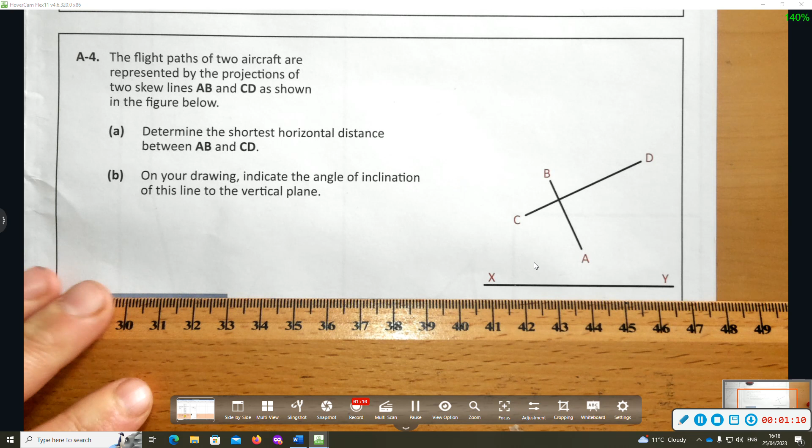Okay, right. Anyways, we'll get started. So we've got to determine the shortest horizontal distance. So to do this, I want to draw a horizontal line from C. Now this is going to be a strike line in plan. Okay, now I want to create a plane that's parallel to line AB and contains the skew line CD.

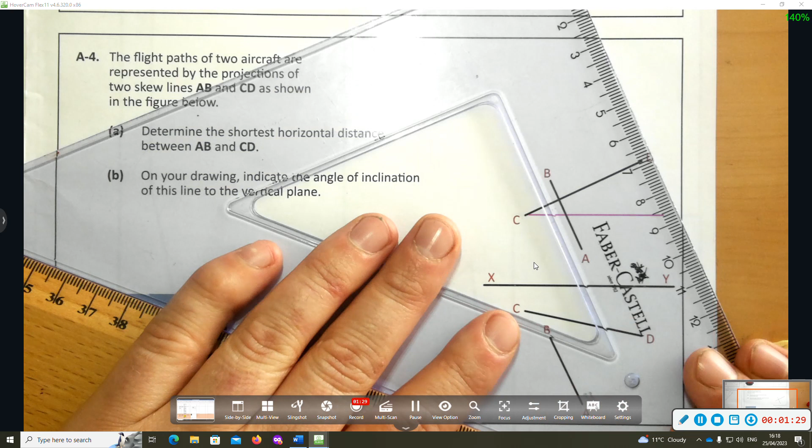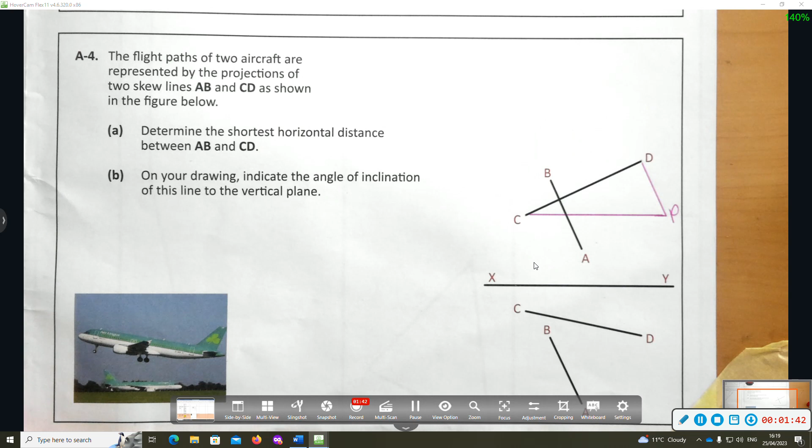So I'm going to go parallel to line AB from point D. Okay, now this is going to intersect at point P. Alright, now I need to get the plan view of point P. And parallel lines are parallel in every orthographic view. So I'm going to drop point P down to plan view.

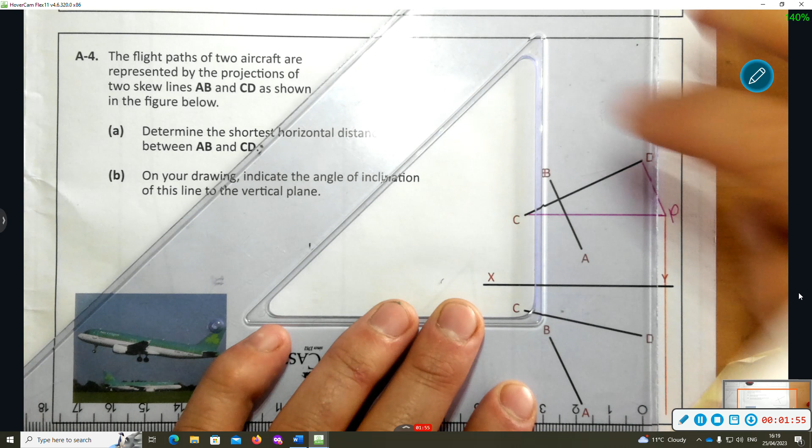Okay, and if I went parallel to line AB from point D in elevation, I must do the same thing in plan. So I'm going to go parallel to line AB, okay, from point D in plan.

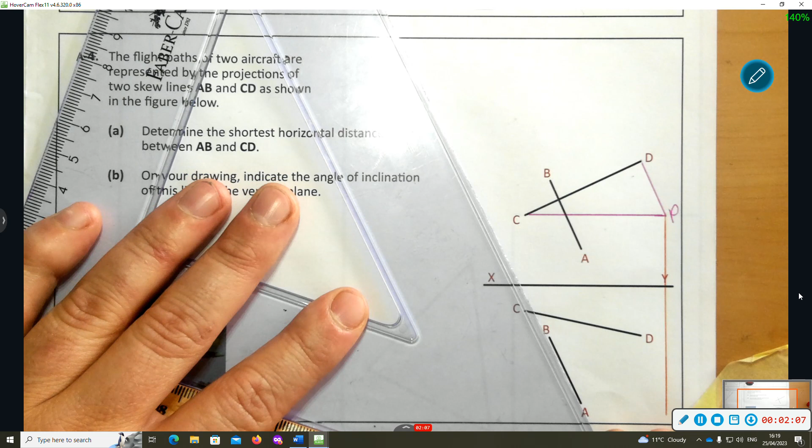Just turn off the light there on my camera, make it easier for me to see.

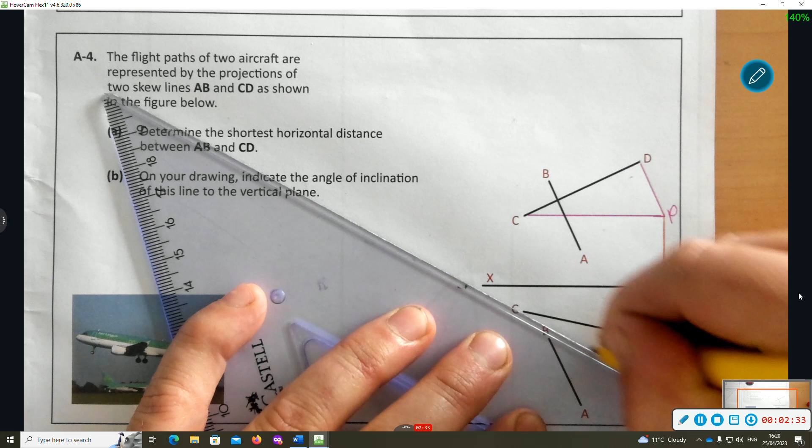So I'm going parallel to line AB from point D. Now, this is point P in plan, and it joins back to C. Now, this is a strike line, okay? And a strike is a true length in plan. So it's the true length.

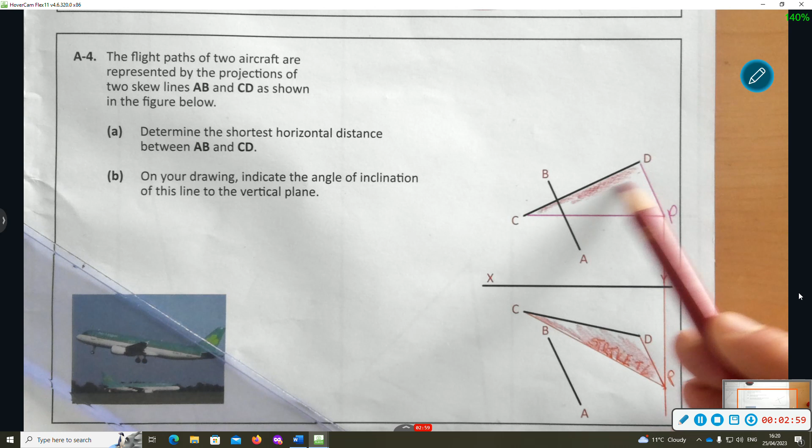The next thing we're going to do now is look along the true length of this strike line, C to P. And when we do that, surface CDP, the lamina, is going to project as an edge view because a line on that surface is going to project as a point.

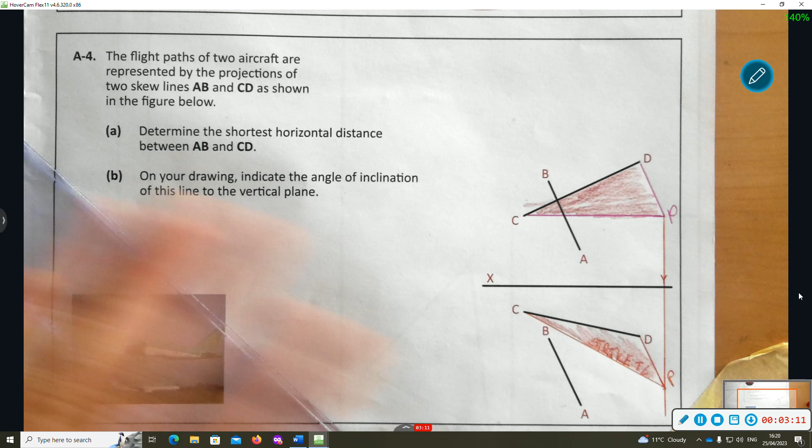So I'm going to project an auxiliary, okay, along line CP, and it has to be an auxiliary elevation, right? It can't be an auxiliary projected from elevation. And the reason for that is because then we wouldn't get the shortest horizontal distance, because the X1, Y1 line would represent a completely different plane.

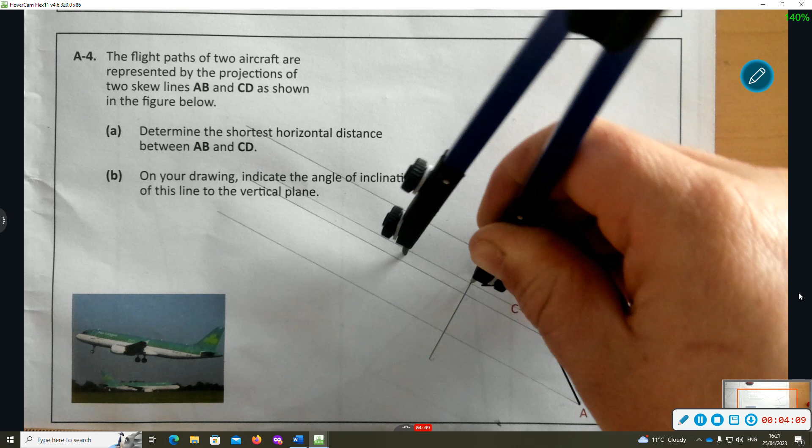So I'm looking parallel to line CP. I'm going to draw in my X1, Y1 line. I'm going to get my heights from elevation now. So I'm going to use my compass to get my heights from elevation. So C to P, going to mark that there. Or sorry, I meant XY line to C rather, and XY line to B, XY line to D, and I have to do point A.

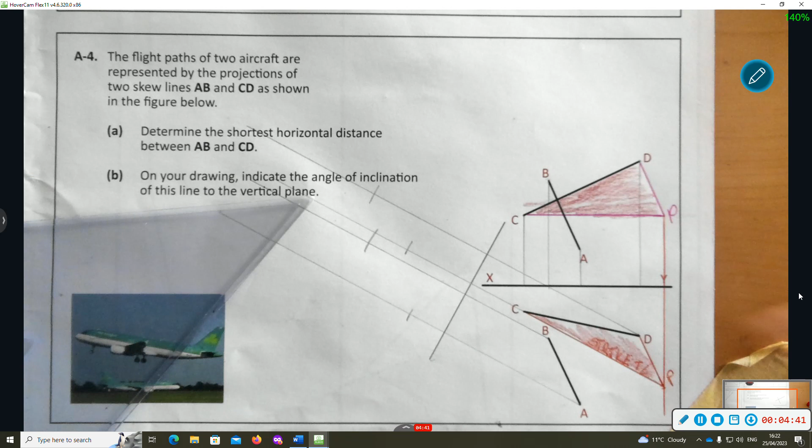So here is point B1, A1, okay, D1, and this is P1/C1. Now I'm going to join A to B. I'm going to join D to C.

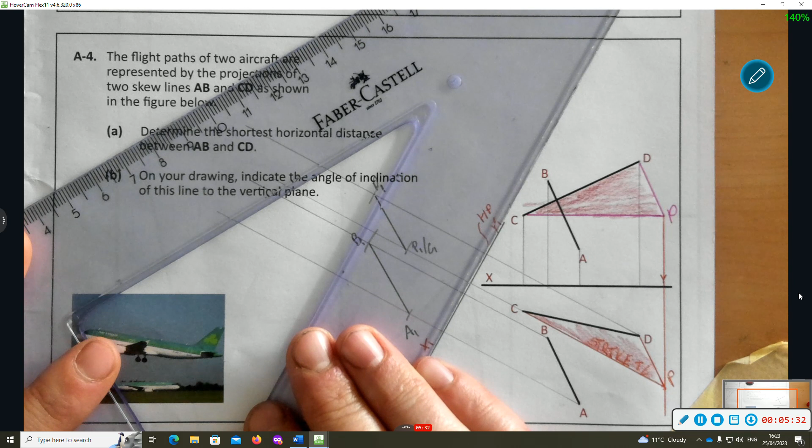Now, once I have that done, I have to look along my X1, Y1 line. So this is an edge view in my horizontal plane, and I have to look along this line here to get the shortest horizontal distance. So the shortest horizontal distance line is going to project as a point here.

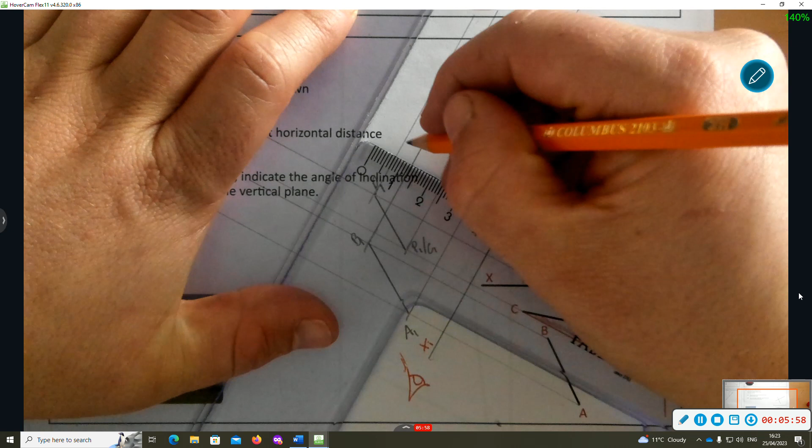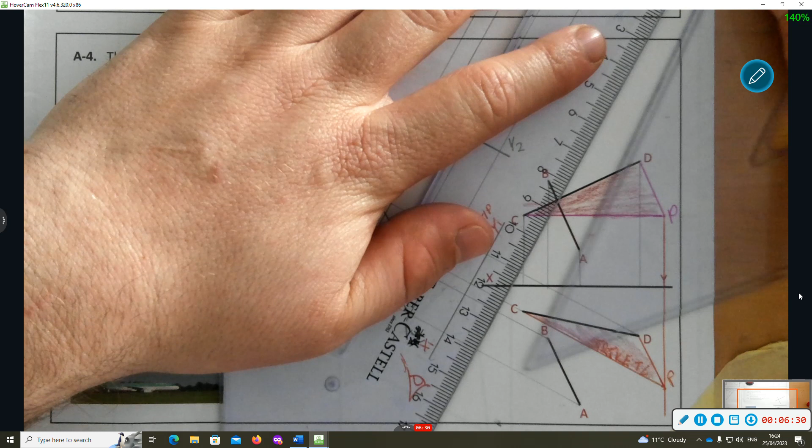And then I have my X2, Y2 line going in here, and I can take my distances from my X1, Y1 line back to plan, or I can draw in a datum line if there's too much space. So I can draw in a datum line, which I will do. So just to save a bit of space there, datum. Maybe it wasn't worth it, maybe it was.

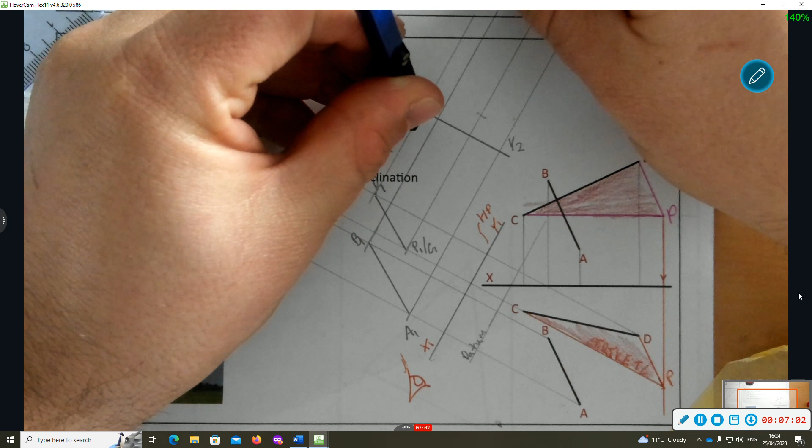So I'm going to put my compass on the datum line, go to point C, find C up here, mark it in here. Okay, then to D, find D up here. I'm going to mark it in there. So I'm running into a little bit of the previous question there. So I'd be wise to keep that X2, Y2 line down much closer. However, I'm going on ahead.

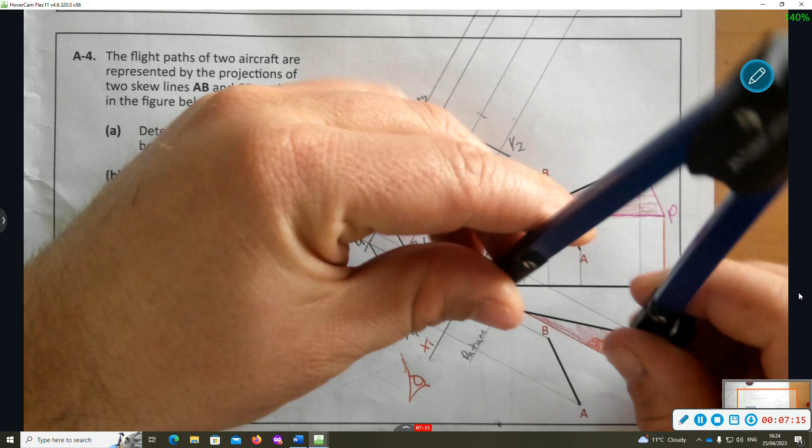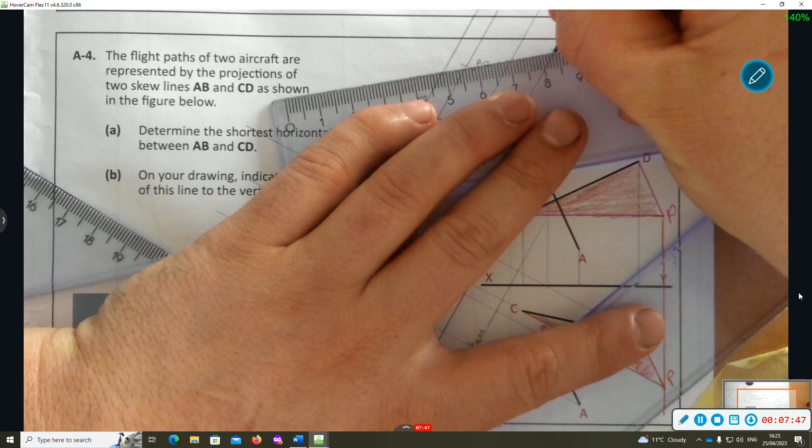So datum line to B, follow B on here. Point A, so out to A, follow A up here. Now, A2, B2, D2, C2. So I'm going to join A2 to B2. I'm going to join D2 to C2.

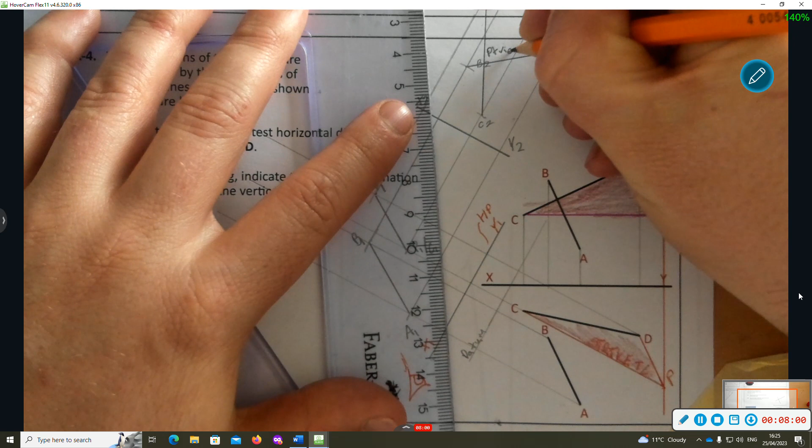Now, their apparent point of intersection is a point view of the shortest horizontal distance. So I need to project that back to my auxiliary elevation and then back to my plan. Okay, and then to my elevation. So I'm projecting that back. So here's the shortest horizontal distance here, and this is the true length of it there, if anyone asks.

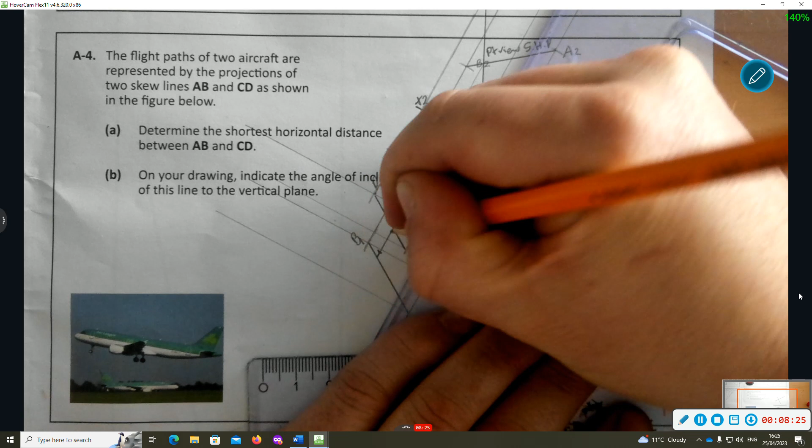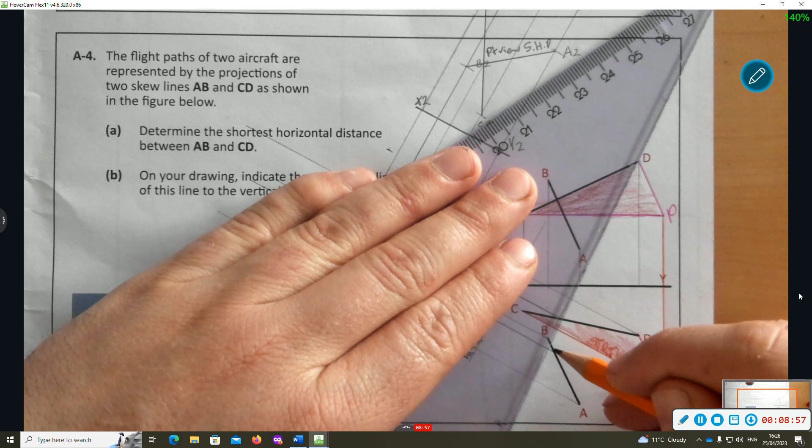That's the true length. And then I'm going to need to project this back to my plan view. So I'm projecting this back to plan. So this is on line CD. I'm projecting this back to line AB. And this is it here. And I'm projecting this up to elevation. And then that joins together as well.

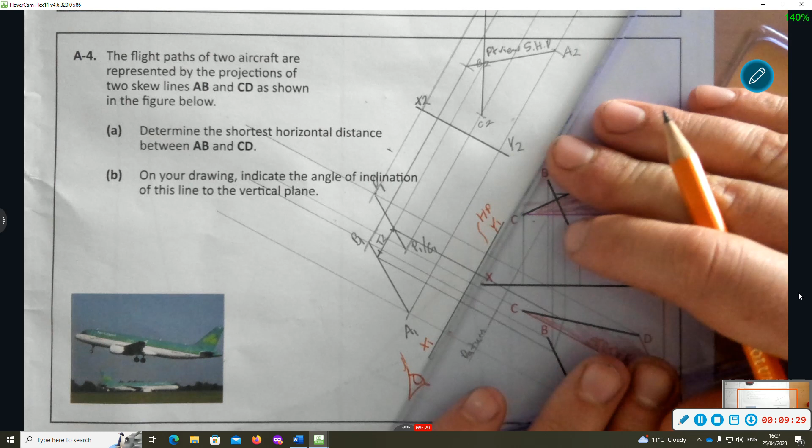And the test there, it's hard to get it accurate, but it also should be parallel to the X1, Y1 line in our plan view. It is quite hard to get them accurate, because it's true length there too, and it's a true length here. Okay, and it's parallel to the XY line in elevation. It's hard to get them accurate.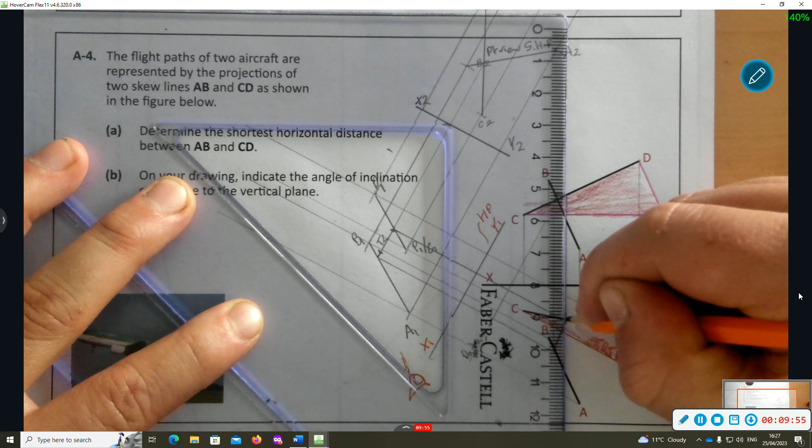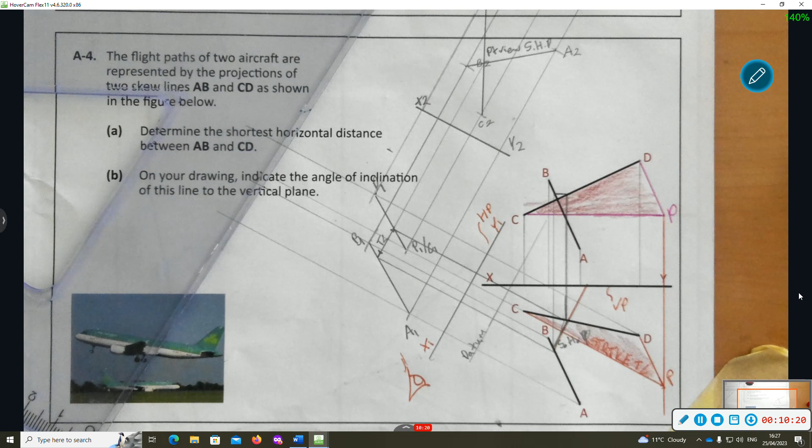So there's our shortest horizontal distance, and it says determine and indicate the angle of inclination to the vertical plane. So we're going to bring this back out. Okay, the vertical plane projects as the XY line in plan, so we're going to measure the inclination of our line to the XY line here. So 63 degrees. Okay, cheers, thank you, bye bye.